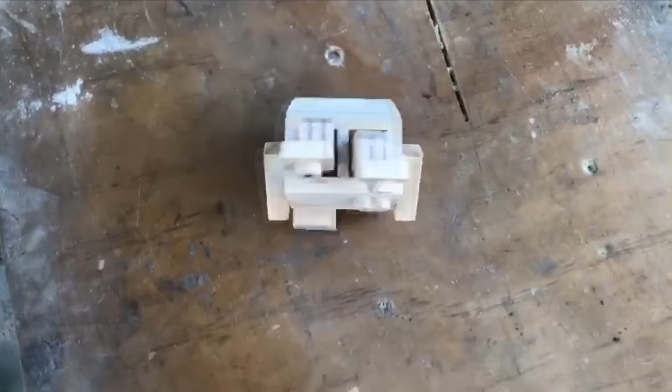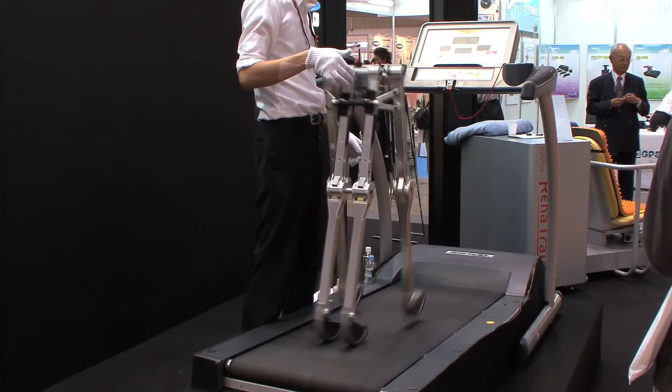The Sano Lab at the Nagoya Institute of Technology have developed a passive walking robot designed to walk using only its own weight, without any motors, sensors, computers or electricity. To begin walking, all this robot requires is a push.

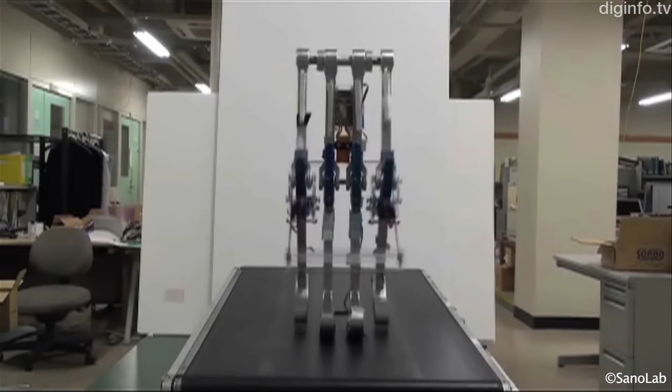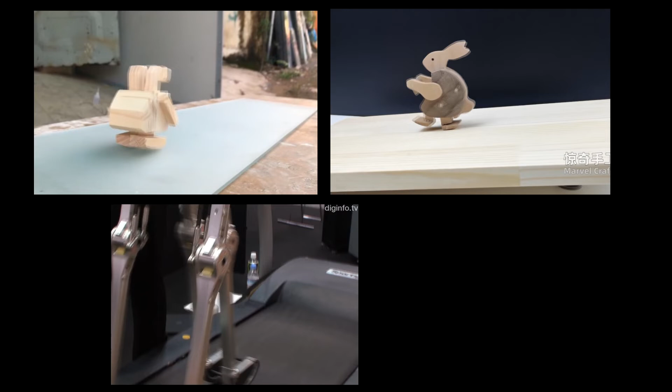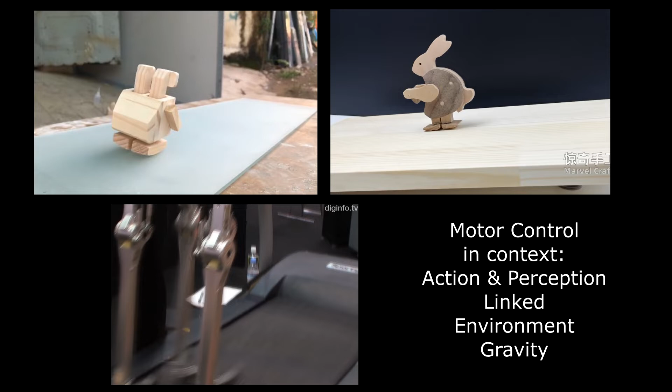These funny little toys and not so funny mechanical devices that walk on their own are known as passive dynamic walkers. Where's the motor control? Action is always done with purpose in an environment. And the number one feature of our environment is gravity. The point here is that there is an interaction, an unavoidable, ever-present interaction between body and gravity. Perhaps some of motor control is less about control and more about allowing this interactive relationship.

As a physical therapist, I was very influenced by these little passive walkers. I used to think of legs as knees, hips, and ankles with muscles. Now I see legs as legs, two struts that hold us up and propel us forward, or backward, or up, or sideways. The knee is just the middle of the leg. It is secondary to leg function, which is driven by the hip and spine, right?

Legs swing forward from the hip, and the spine lengthens and rotates to assist. It is not motor control of a knee, but rather it is the leg-trunk world interaction that are the mechanics for control. Maybe there's possibilities here for enhancement techniques in rehabilitation.

We can see this leg concept in the next video segment, where roboticists develop a walking robot with leg dynamics as the critical factor for successful control. The determining factor for successful robot locomotion is the angle of the leg to the trunk, or the vertical, and the amplitude of spring forces. Petman is the robot.

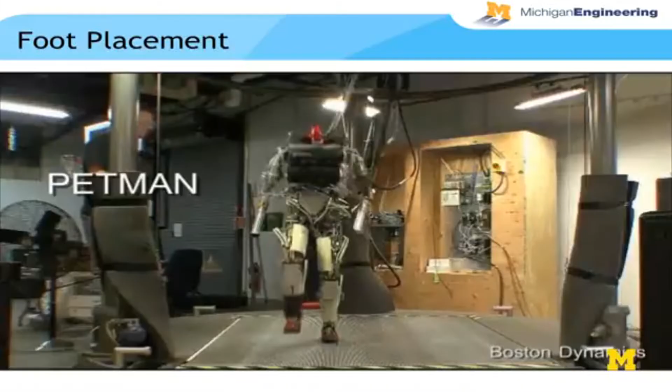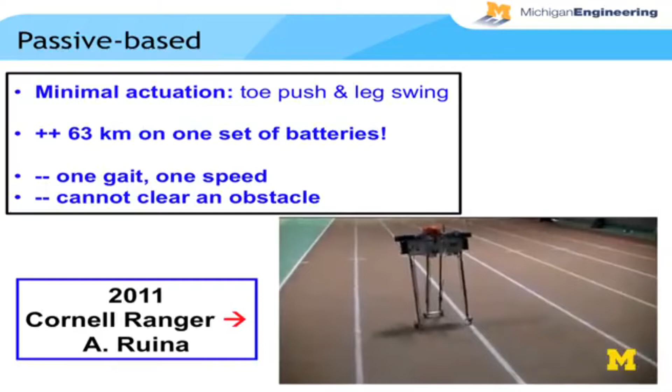So these robots, they're trying to use little tiny motors and do locomotion with the least amount of energy possible. They're looking at energy efficiency. So this robot's at Cornell. It is the most energy efficient robot in the world by far. It can walk 63 kilometers on a pair of D-cell batteries, flashlight batteries, okay? It wasn't using those, but it could. Problem is one gait, one speed, and I could knock it down with this clicker, okay? So it's not agile, but very energy efficient.

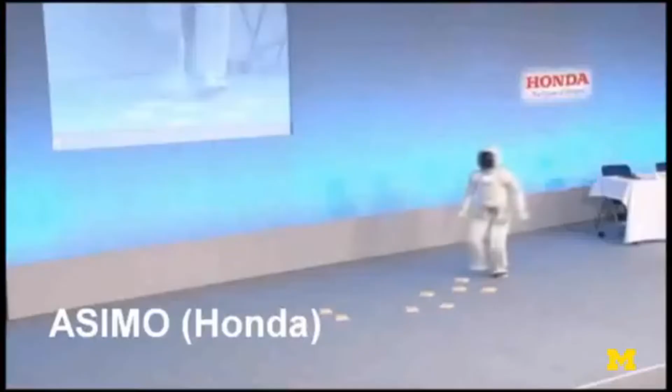Here's another group. These are the flat-footed walkers. Asimo's a nice example. Its control method keeps the foot flat on the ground. So they're trying to treat the robot like it's a manipulator. They're doing everything possible to avoid having to treat it as a Segway, something with a rolling contact is what I'm emphasizing there. And you get robotic walking. It's an impressive machine. If it was my work, I'd be waving the flag, there's no doubt. But it doesn't do what we want it to do, which is to really deal with under-actuation, these rolling contacts. Now here's a more serious group of robots, but you'll see why.

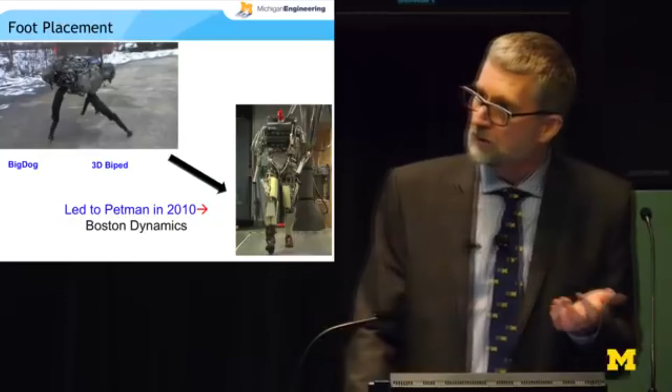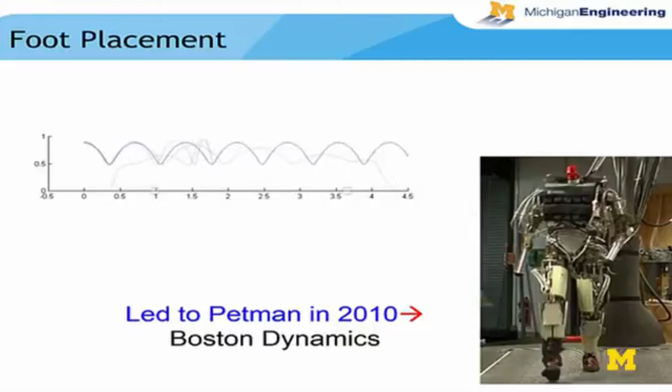Almost everybody knows Big Dog, Boston Dynamics. I'm not going to show you a video of that because we're doing bipeds today. They took parts off of Big Dog and they built Petman. Using control principles that Marc Raibert developed at MIT back in the mid-80s, they tried to control the angle of the leg using a very simple representation of the center of gravity, the center of mass of the robot. If you get it just right, you get periodic motion. If you get it too far, it slows down and falls backwards, etc. So they call it foot placement strategy or capture point.

Now, if you get it right, you get the best walking I've ever seen in a machine. I mean, by far, this is the best walking. Look at that. I mean, there's a person inside the suit, right? It can't be a machine. That is fantastic walking.

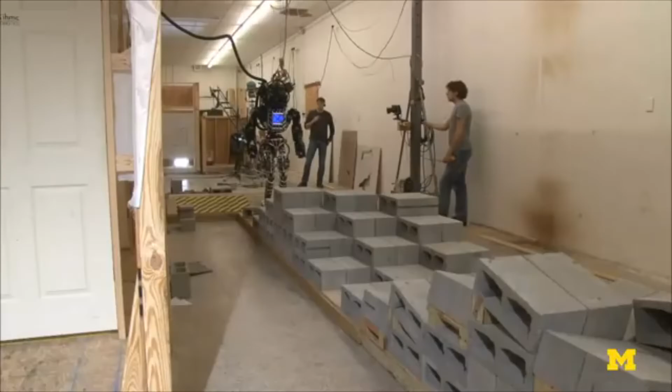Now, here's the next generation of Petman, Atlas. I haven't started the video yet. Training for the recent DARPA robotics trial. So I've started the video. Lights flashing. It has a laser scanner in there, it has cameras, it's calculating the terrain, deciding where to place the foot. So this is how all of the robots moved at the recent trials a year ago. It's calculating.

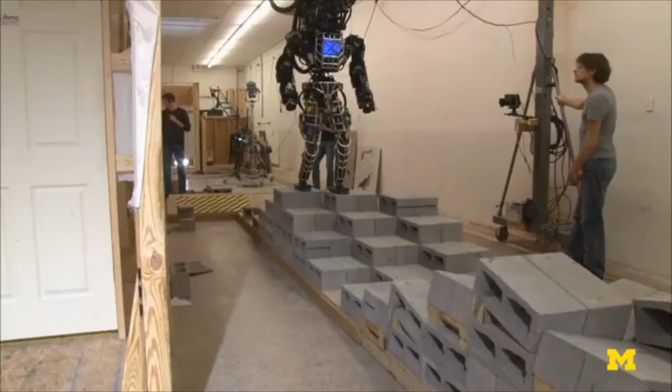Remember, it's a rescue situation. The house is on fire. The dog's in the back room. Now, once again, if this were my machine, I'd be going, yes, okay? But it's calculating to the millimeter where to place the feet. And that's fundamentally not what you want to do here, okay? So that's the speed that all of them moved at the trials. This robot came in second place. Only SCHAFT beat it.

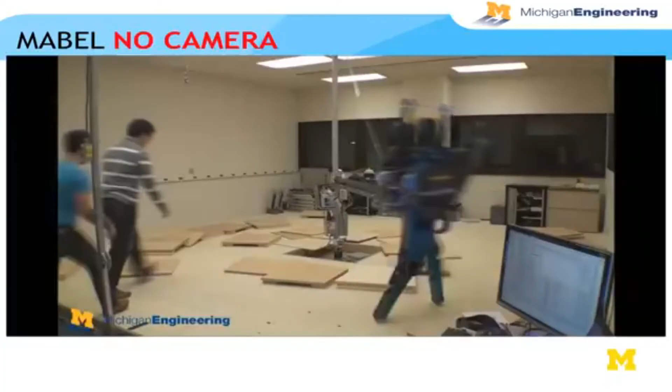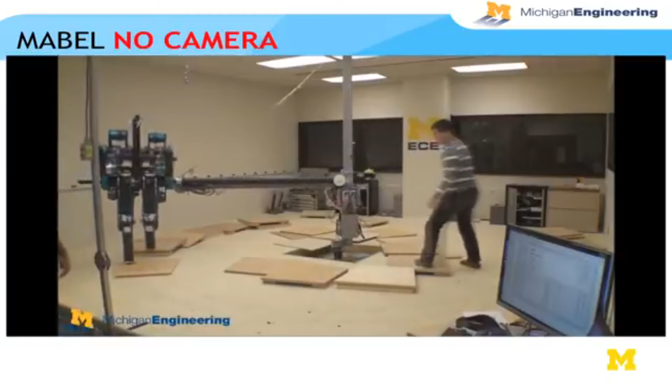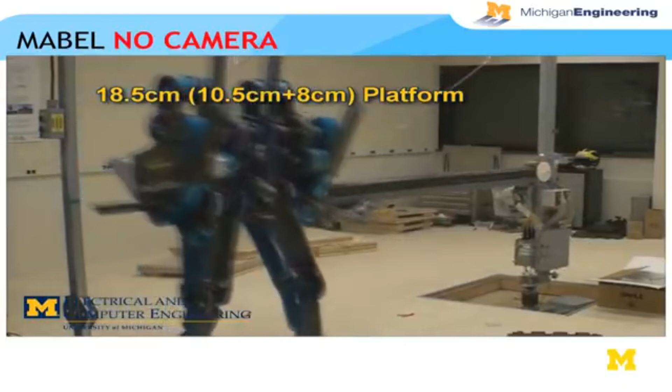So here's MABEL, no camera, no sensing of the environment. Our approach is to develop locomotion algorithms that are so insensitive to uncertainty in the ground that it can just plow through rubble. And I consider this superhuman walking. I think a human would do a faceplant here. The robot cannot see the platform. It does not know the platform is there. Look at this. It has reflexes built in. My reflex would be to throw out my arms, okay? Because my face is coming next.

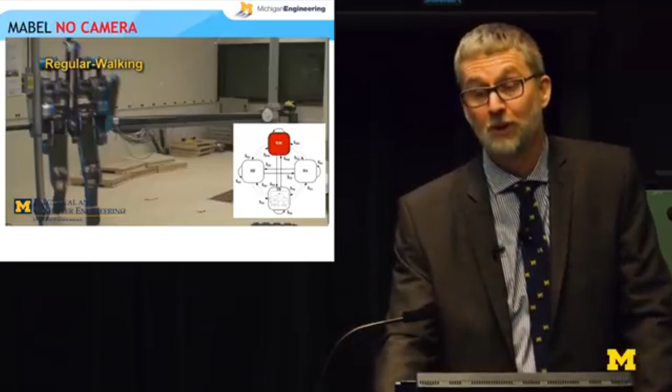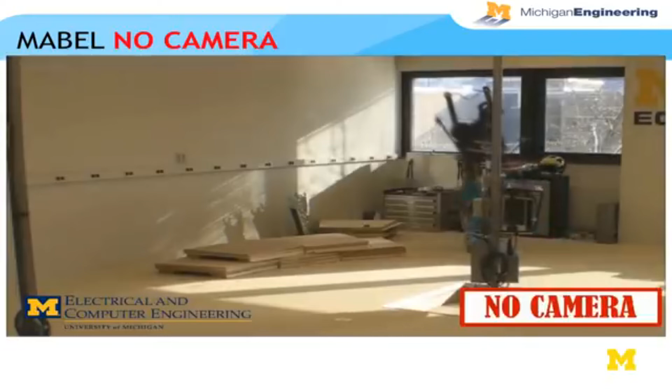Now, if we can do that on MARLO, we'll be superstars. We're not there yet. Still pretty far from that. Boston Dynamics is catching up. There's Atlas. So maybe we'll see something really interesting in June at the next DARPA robotics. No camera, no vision, no program, no knowledge of the environment. MABEL goes forward with reflexes to navigate rugged territory.

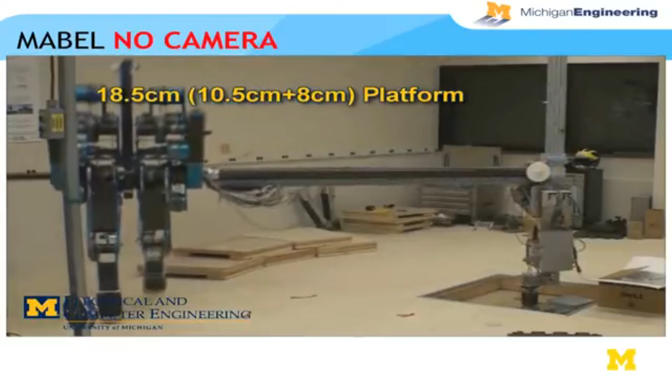What is motor control? I have studied and tried to understand forward and inverse models for motor control. I have read into central pattern generators for motor control. There is the one-to-one motor cortex to muscle view of motor control versus the movement for motor control. The hardest for me to grasp has been the equilibrium point hypothesis from Anatol Feldman, which right now seems to me to be the most acceptable theory for motor control.

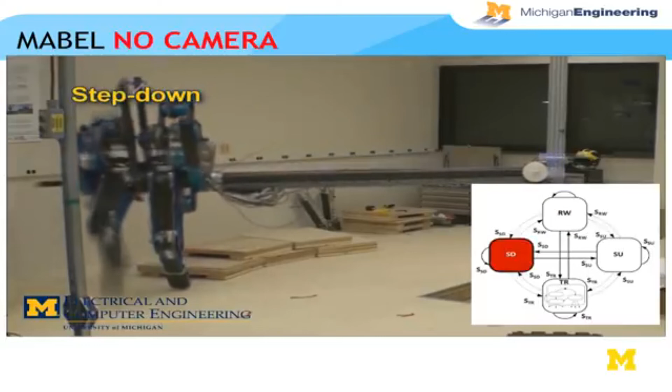The Petman robot's very human-looking locomotion is driven, it appears, by spring force and angle, that is, by an equilibrium point. MABEL navigates rugged territory with reflexes, without vision or motor programs. For me, all of these examples expand my view of motor control and what it is and what it is not. I feel more flexible in my thinking. There are options rather than fixed dogma, which we are all susceptible to. Ultimately, I imagine that an approach to rehabilitation based on these evolving concepts will lead to better treatment outcomes.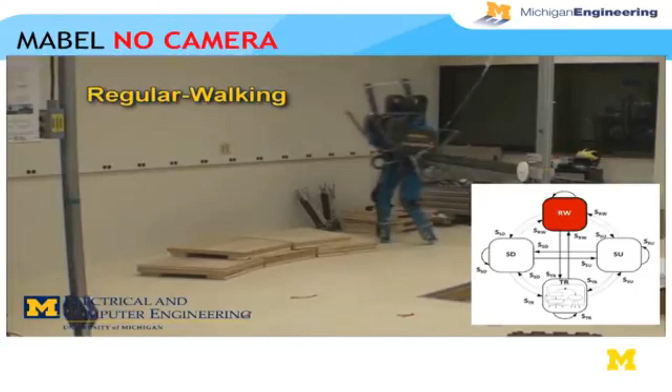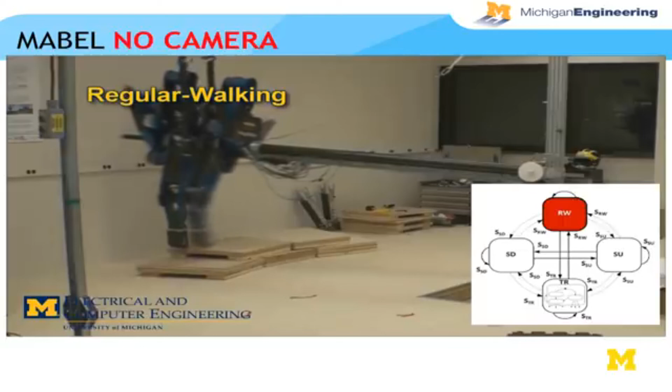As science proceeds with explorations and understandings of motor control, there has been a simultaneous development linking action and perception and action and mind. Call it body-mind or embodied mind. We are perhaps a machine with consciousness and learning. Once trained, the machine operates automatically, spontaneously. This includes the good and the not so good motor habits.